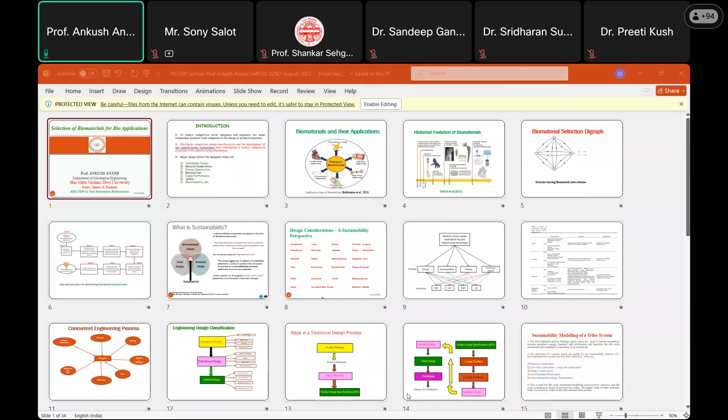Very nice, very nice. So biomaterials are basically those which are to be implanted into the human articular system. So when we say human articular system, it means the human body. So the most important requirement for a biomaterial to be developed is biocompatibility or biotoxicity. So either you call it biocompatible or you call it bio non-toxic.

So it means it should have minimum or zero toxic harm rate, because when we are introducing this material into the body, means into the fluid inside the body, then it should not have any impact or rather any toxic reaction with the body. Why? Because if, God forbid, any chemical change takes place inside the body by introducing this biomaterial in the form of some implant, then it is very likely that some reaction takes place inside the body and the patient is likely to suffer.

So biotoxicity or biocompatibility is the most important aspect of biomaterial selection. Because the thing is, there are a wide variety of biomaterials that are available before the designers. But which material to select, how to select? So there has to be some.

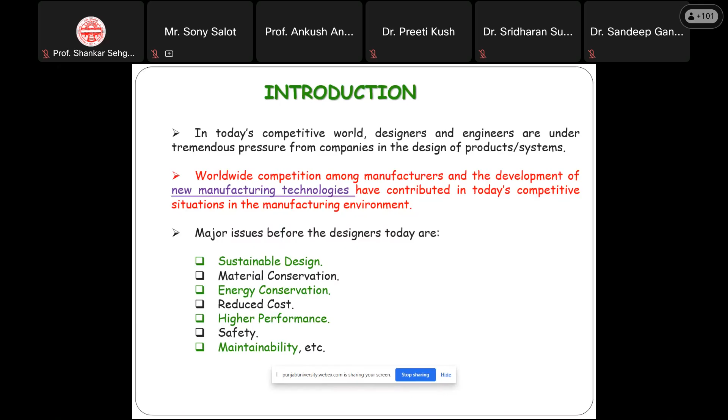So biomaterials and their applications. Generally for biomaterials, we have a large number of materials available. They are generally your polymeric biomaterials, used in applications like skin tissue engineering, bone tissue engineering, cartilage tissue, corneal tissue engineering, cardiovascular or cardiothoracic applications, and some drug delivery systems. This is a general classification of biomaterials. Now,

Hello, Dr. Ankush, sir, your voice is not audible. Participants, am I not audible? Your voice is audible now, sir. Okay, okay. Or you can do one thing - you can stop sharing this PPT for a while, the moment it is required I'll let you know. Probably this may be the reason. Okay sir, okay sir, maybe that's the case.

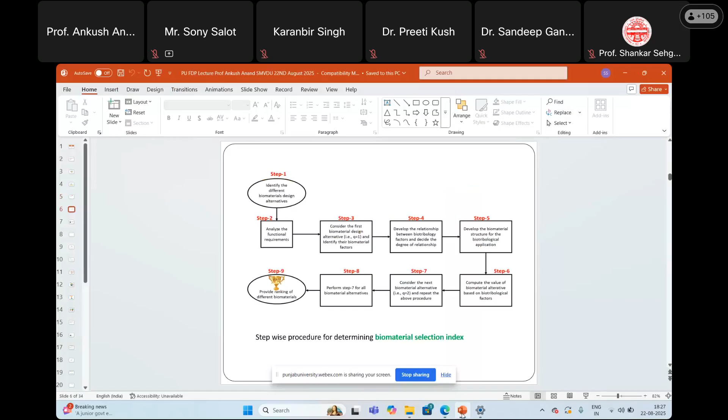So, selection of best suitable material for hip joint. Let us say for hip joint if you want to select, so what are the factors? The basic factors are your mechanical properties that involve your strength, stiffness, and hardness, and other things.

But most importantly is your density. Then biocompatibility, tribology, and economical aspects. So these are the 4 major criteria on the basis of which the material selection for any biomaterial takes place.

Participants, do you think there can be any other factor which is responsible? Because I have tried to include 4 factors for material selection. Number 1, strength. When we say strength, it is essentially your mechanical characteristics or mechanical properties. Then you have your biocompatibility. I have already explained, in biocompatibility, in bio...

We do a test. There is something known as standard medical test. So if the material or the implant passes a standard medical test, then only it is approved, and then only it can be recommended for introducing into the human articular system.

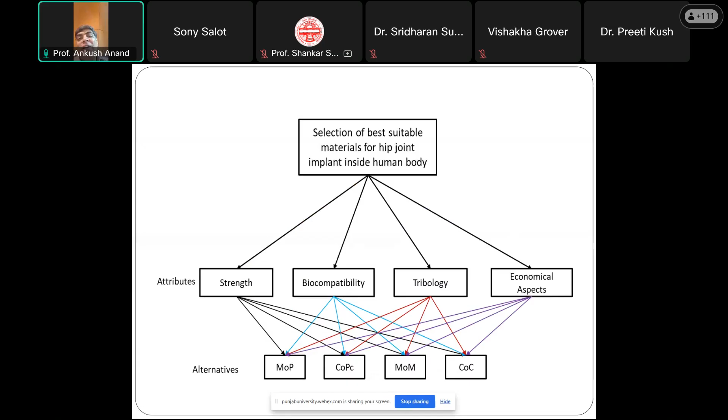That is why a team of designers. A mechanical engineer is one who will be having a strong hold in the area of strength, toughness, hardness, stiffness, density, corrosion resistance, wear resistance, something like that. But when it comes to biocompatibility or toxicity, then definitely those who are involved in clinical procedures or clinical practices will have a greater role to play. So that is why it really becomes challenging while selecting a material.

But definitely every candidate material will have some set of properties, meaning what are the permissible limits, then various test reports, the cytotoxicity and all that. So a number of things are there. That is why material selection is very challenging otherwise. But when it comes to biomedical applications, it becomes very sensitive, because human lives are involved, right?

So should I proceed further? Yes, sir. Thank you, sir. Okay. Can you go to next slide, please?

Next means previous here. Okay, so these are some combinations of materials like metals, ceramics, polymers, then biologically derived materials. They have different pros and cons, right? I'll just talk about examples like stainless steel, cobalt-chromium-molybdenum alloy. Then you have titanium, then titanium-aluminium-vanadium. Then you have nitinol, then nickel, platinum, tantalum, and so on. They are generally used in orthopedic, orthodontic or cardiovascular areas, the heart.

Similarly, when it comes to ceramics, a good variety of materials are available these days. You have zirconia, hydroxyapatite, alumina, beta tricalcium phosphate, then pyrolytic carbon, and so on. And when it comes to polymers, see the wide range of materials. You have PMMA, that is polymethyl methacrylate. Then UHMWPE, ultra high molecular weight polyethylene.

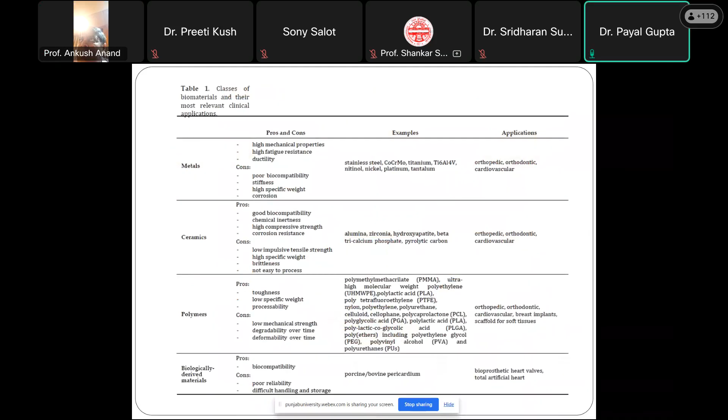whatever you see, material is something everyone is dealing with, whether it is a cooking utensil, your medicines, food stuff, or your hand; anything that you use is made up of material. Do you agree? I agree with this point, but my only concern is, can we say this artificial kidney or any kind of tissue is a biomaterial? I believe they come under the tissue engineering part.

See, whatever field or domain we do, ma'am, are you a clinical doctor, or which field are you from? I'm a researcher. Okay, you are a researcher. The thing is, whether you call it tissue engineering or bioengineering or whatever, basically it involves material scientists, right? Yes, you are right in this. If we have to provide a scaffold for the regeneration of tissues, or if we want to design a complete organ, then definitely we have to provide some material that supports its growth along with maintaining the shape.

Because sometimes it becomes really difficult to say whose role is greater or who has a greater contribution. Let us say the forceps or surgical tools that our surgeons use while carrying out surgical procedures. Essentially they are designed and developed by engineers, and mechanical engineers have a greater role to play. But they remain tools. For things we implant inside the body, there we have the categorization, hard material and soft material. Yes, that is definitely there.

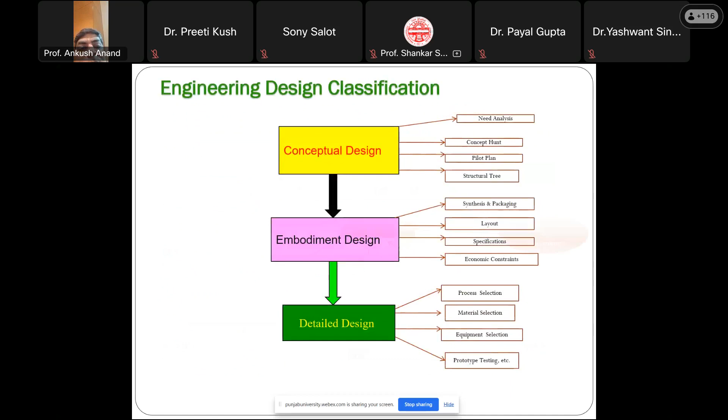Can you go to the previous slides? In one of the previous slides, one flow chart is there. Back. Maybe the third or fourth slide. Go back. It is from the start. You are on the right track. Go back. Okay. Sustainability, I think I'll explain it. Go back.

One flow chart is there. Yes.

So, stepwise procedure for determining biomaterial selection index. So basically what we are doing, we are determining or evaluating the biomaterial selection index for every candidate material. It may be polymer, it may be metal, it may be ceramic, it may be bio-inspired material, or maybe any material, right? So the concept is the material having the high biomaterial selection index will be the first priority.

So now, how to determine the biomaterial selection index? There is a procedure. So what is the procedure? It starts like this. Identify the different biomaterial design alternatives. Like you have metals, you have ceramics, you have polymers, you have bio-inspired materials, and so on, right? Analyze the functional requirements. It means for what particular application you are going to install that biomaterial, or you're going to use this as an implant in the human articular system. So this is your functional requirement.

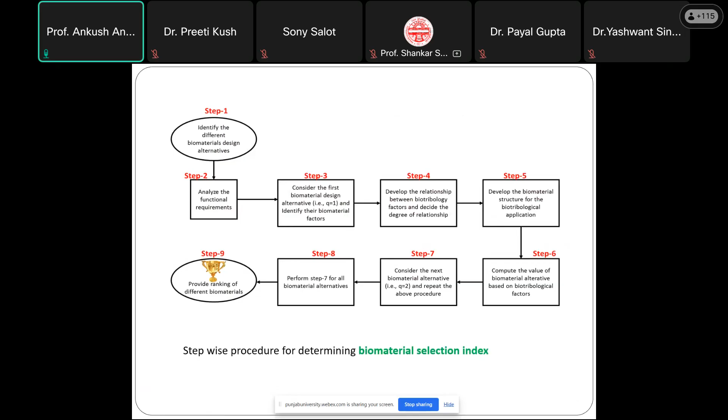So yes, sustainability is there. I wanted to explain, but it is already there. Why? Because it is something related to environment, society and people - environment, society, and your economy or profit. So the sustainability concept is already taken care of while designing for any biological system or engineering system these days, because of concern for environment or life cycle aspects.

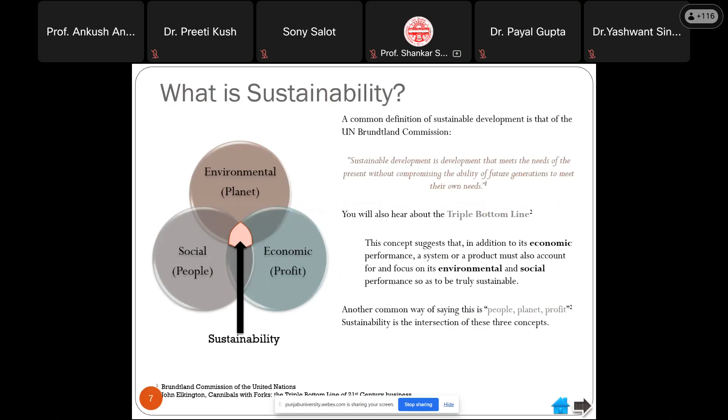So, design consideration and sustainability perspective. How many factors does a designer have to consider while designing for any particular application, maybe a biotribological application?

Functionality, maintenance, reliability, wear, safety, toxicity, lubrication effect, environment, weight, technology used, noise, friction, aesthetics, remanufacturability if possible, strength or stress, volume, corrosion resistance, longevity, marketability, and so on. So these are some of the factors.

So that is why it is not one man's job, it is not one designer's job. It is related to teamwork. When we say teamwork, it means you need to involve the culture of concurrent engineering. You need people from clinical practices, people involved in surgical procedures, material scientists, people with manufacturing or production experience, and people from marketing and so on.

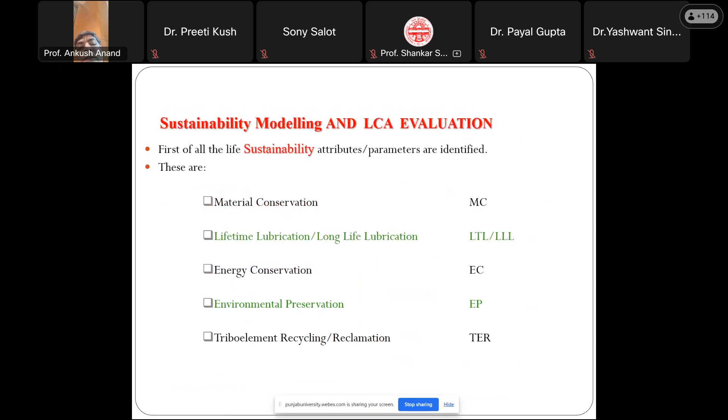So this is how you develop the interrelationship, and on the basis of that, this is how we carry out the sustainability modeling of a tribo element - how one factor relates to another. What are the various small factors essential in that, and on the basis of that you come up with a parameter.

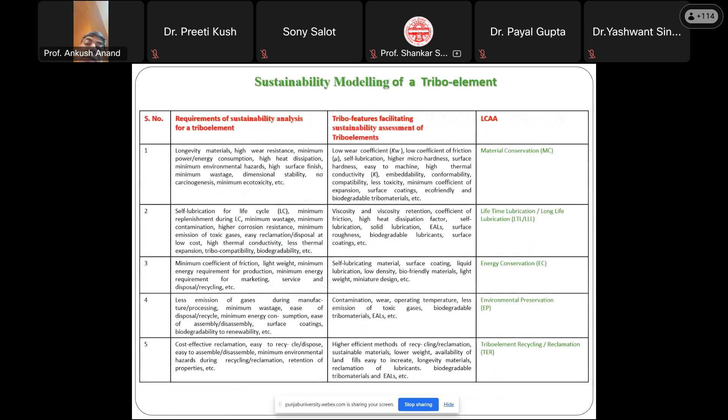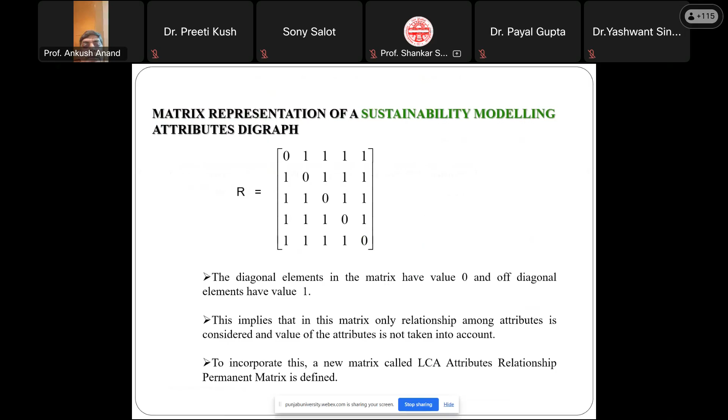So this is how the degree of interrelationship is represented. If it is strong, we give a score value of 0.3. If medium, 0.2. If weak, 0.1, and similarly if none, 0. It is not necessary that you give values in fractions or decimals - you may give values in any number, but in order to reduce subjectivity, a lower scale is considered.

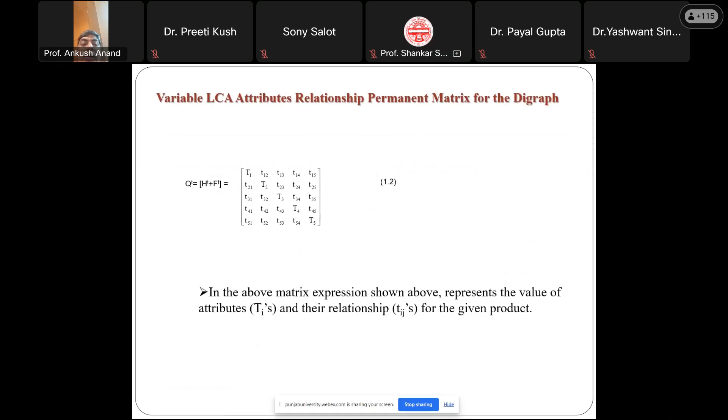So this is the permanent function in matrix form. When you expand this matrix, it will be something like that. This is known as the permanent of a matrix, where all signs are positive - that is, no same polarity, meaning there is no plus minus, all are plus. This is because all plus means no information should be lost; we are carrying out a comprehensive analysis of every candidate material based on the identified parameters.

Similarly, the LCA alternative is better if its LCA-I index is higher and vice versa. The one having the highest index value is the first choice, and based on that you can carry out the evaluation. This example is for some other material, not biomaterials, but the concept remains the same. Being a mechanical engineer, it becomes very difficult to rank and evaluate biomaterials unless we have complete information or data of the materials, as pointed out by some participants. I really appreciate that.

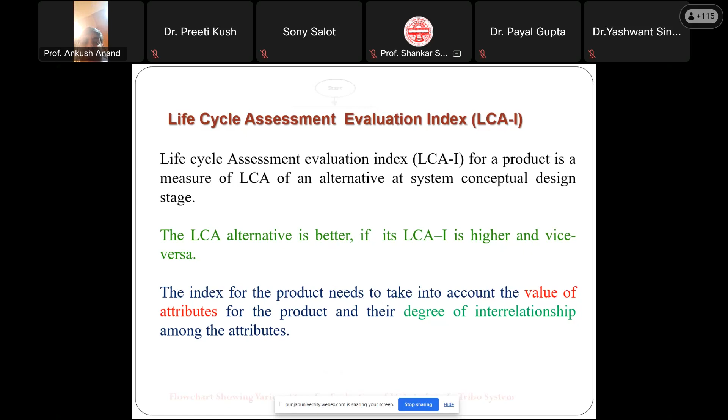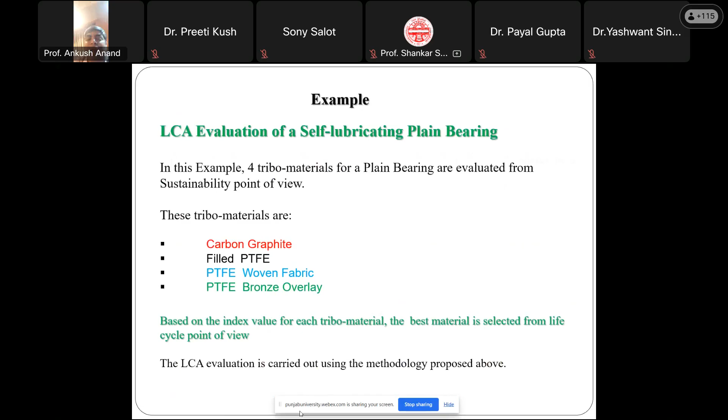Yes, this is a procedure, already explained in different form. So I have taken the example of a plain self-lubricating plain bearing. I had 4 candidate materials: carbon graphite, filled PTFE, PTFE woven fabric, and PTFE bronze overlay. Please remember, these materials are not to be used as bioimplants, these are for some other application. Not bioimplant, but just to explain the procedure, I have taken this example. Otherwise, I have explained the procedure, so now move to the subsequent slides, because this is how the process works.

So think green becomes sustainable. When we say green, while selecting materials for bio application, you must ensure the concept of green. It means ecotoxicity, biocompatibility, or toxic harm rate. So these were some of the things I wanted to discuss, because since I'm using it through my phone and I am far away from my place, I am already there for my other event, right? So that is the thing.

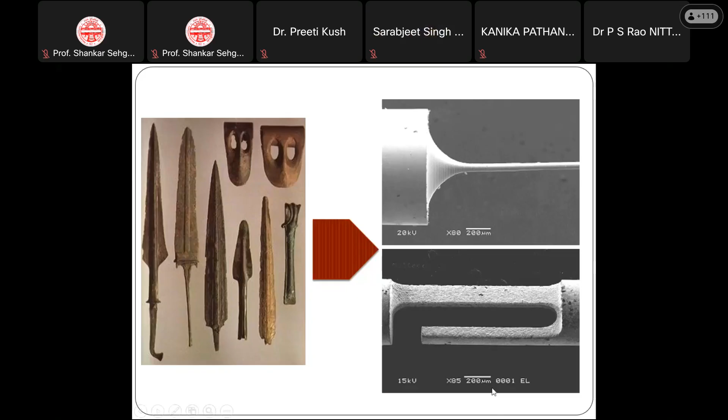The main focus of my topic is the hybrid machining process of alloys and super alloys like titanium, Hastelloy, Monel material, and how we can manufacture these. My introduction covers advanced machining processes, then hybrid machining processes, and electrochemical honing, which is one kind of hybrid machining process combining electrochemical machining plus honing. Then I will also cover future scope. Let us start with this lecture.

My main objective in taking this short-term lecture is to share my knowledge and findings on hybrid machining processes of super alloys and highly resistant alloys, to encourage the research community to focus on hybrid machining process and carry out research in this field to mature the process and make it commercialized. So far we have done many research projects, and now the main focus is hybrid machining process, so that we can develop one process and then go for machining.

Machining, in general conventional terms, is a subtractive type manufacturing process in which surplus material is removed in the form of chips to impart the desired shape. To get the desired shape, we have to remove the excess material, finishing to the final object using suitable cutting tools and relative motion.

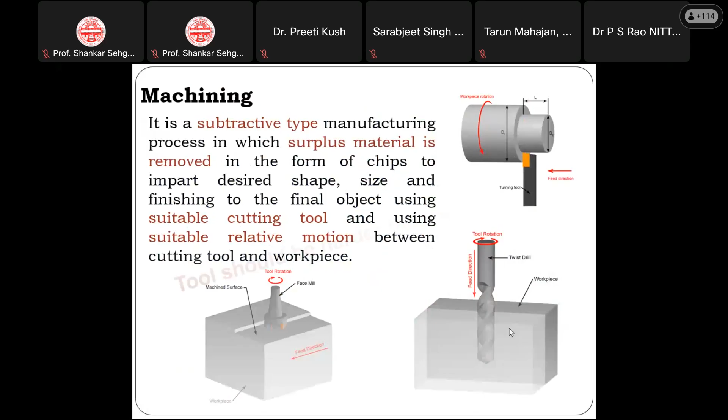So the main introduction is that the development of advanced technological industries has been accompanied by the development of very hard, high strength and difficult to machine materials. These difficult to machine materials are called super alloys, Hastelloy, titanium, tantalum, and non-ferrous alloys, stainless steel, composites, ceramics. These materials are very difficult to machine by conventional machining. For this purpose, we have to go for advanced machining processes or hybrid machining processes.

These materials have high strength to weight ratio and low machinability. That's why the material removal rate is also very less in this case. But we get super finishing, with surface roughness up to the micron and nano level. Producing complicated geometries and maintaining high dimensional accuracy in such materials becomes extremely difficult with conventional machining. That's why we are going for non-traditional as well as hybrid machining processes to machine very complicated geometries with high dimensional accuracy.

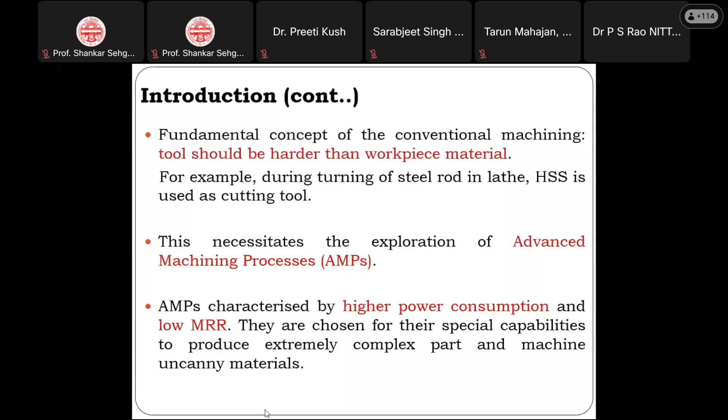The fundamental concept of conventional machining is that the tool should be harder than the workpiece material. For example, in the lathe, HSS, high-speed steel, is used as a cutting tool, and this necessitates the exploration of advanced machining processes. Advanced machining processes, AMPs, are characterized by high power consumption and low MRR. You can choose electrochemical machining, electro discharge machining, ultrasonic machining, water jet machining, laser jet machining. They are chosen for their special capabilities to produce extremely complex parts and machine difficult materials.

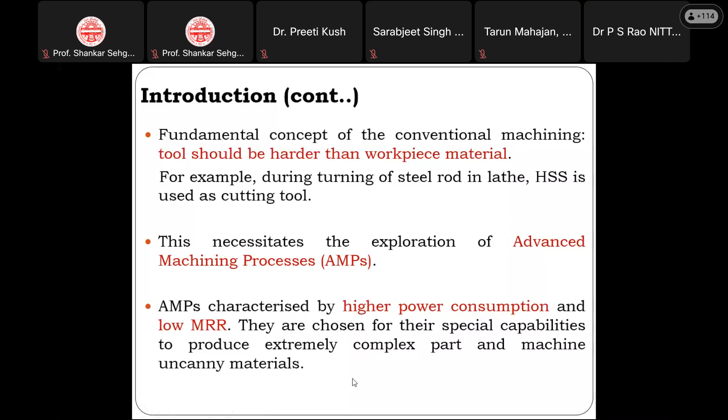Okay. So here I will highlight the advanced machining processes. We have four kinds of energies: mechanical, chemical, electrochemical, and thermoelectric energy. With mechanical energy, the process is driven by high velocity particles, and the processes are abrasive jet machining and ultrasonic machining. Chemical is the corrosive action of an agent, that is chemical machining and photochemical machining.

Then electrochemical, that is ion displacement. The ions take part in the machining, and cations and anions form at the respective cathode and anode, so that we have the chemical reaction. That chemical reaction removes the excess material from the workpiece, so you can get surface roughness up to the nano or micron level. The processes are electrochemical machining and electrochemical discharge machining.

The last is thermoelectric. Thermoelectric energy is used for material removal by fusion and evaporation. The processes include electro discharge machining and electron beam machining. Normally we use all these processes for better finishing and more material removal.

Now you can see the list of AMPs. Here I highlighted the various AMPs by energy type: mechanical, electrochemical, chemical, and thermoelectric. We discuss one by one what the process is, how material is removed, the energy source, and the surface roughness quality. For mechanical, the mechanics of material removal is erosion, the transfer media is high velocity particles, and the energy source is mechanical or fluid motion. The processes include abrasive jet machining and ultrasonic machining.

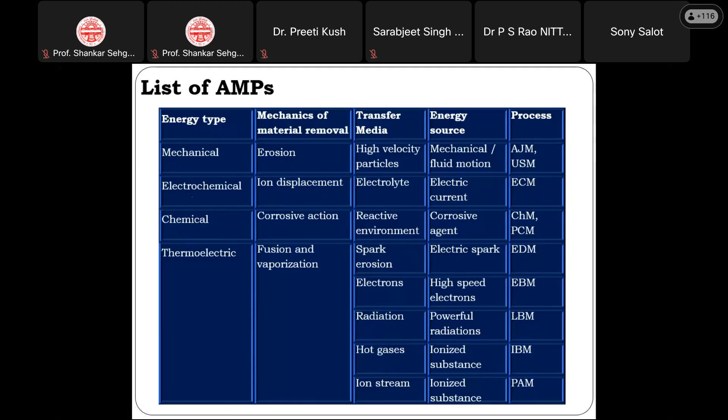Your voice is not coming. Yeah, 1 minute, sir, I will take 1 minute. Okay. Yes, sir, am I audible? Yeah, okay.

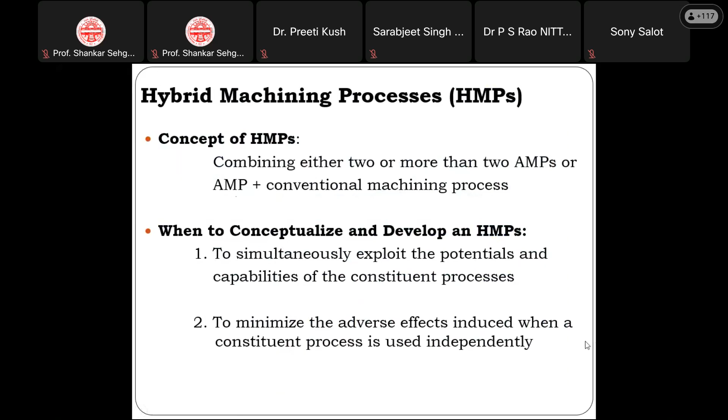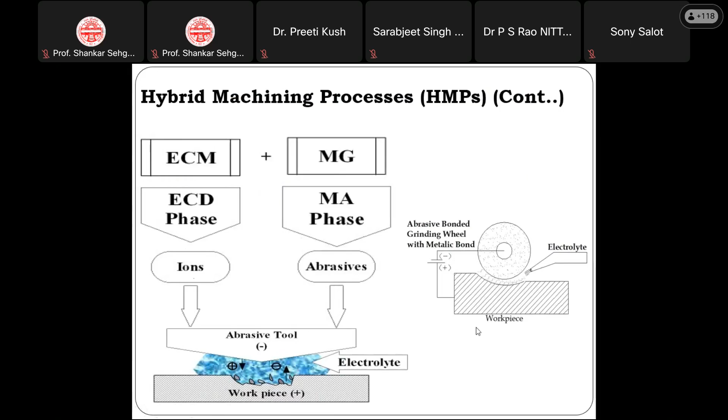Now the classification. You can see constituent processes are directly involved in material removal, that is the electrochemical grinding process. Then one process directly removes the material, while the other process only assists by making the machining environment favorable. This is ultrasonic assisted abrasive flow machining. Here during the abrasive flow machining, we are removing the excess material. The ultrasonic is giving assistance to the abrasive flow. So through this ultrasonic assistance, we are getting some amount of material removal, but more material is removed by abrasive flow machining.

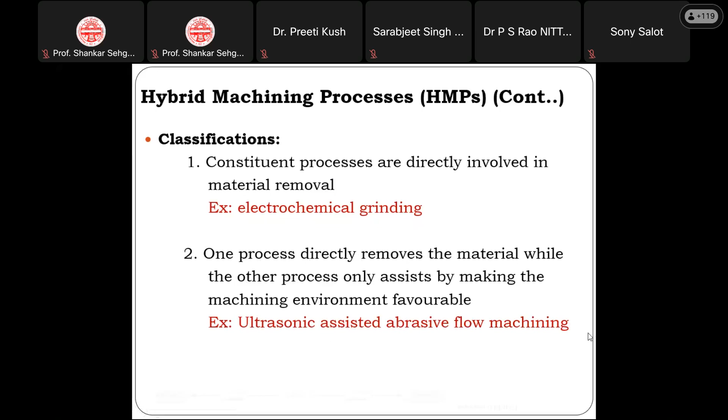Now we can see electrochemical discharge machining, ECDM. What happens exactly here is electrochemical dissolution plus electrodischarge erosion. Here normally we are passing the electrolyte through this. Electrochemical discharge machining is the combination of electrochemical machining and electrodischarge machining. So here you can see the electrochemical dissolution plus electrodischarge erosion.

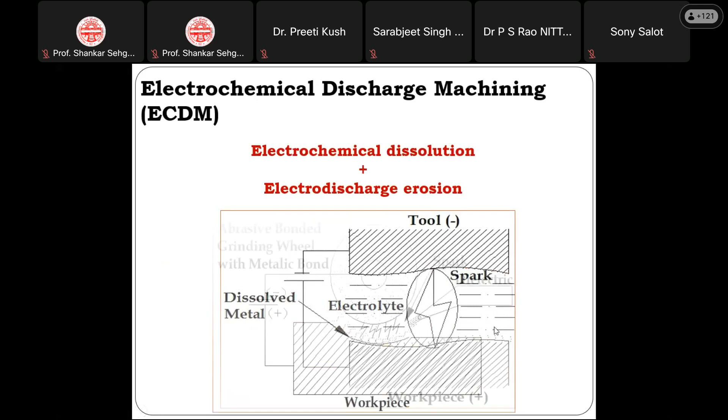Next, electrochemical discharge grinding. Here you can see electrochemical dissolution plus mechanical abrasion plus electrodischarge erosion. So here the tool is connected to the negative, and the electrolyte is passing. Electrolytic dissolution plus mechanical abrasion is there, then electrodischarge erosion. The three processes are taking place in this.

And the left part is the abrasive bonded grinding wheel with a metallic bond. The abrasive may be any kind: cubic boron nitride, aluminum oxide, silicon carbide, diamond, any abrasive we are using. Since those abrasives are tough in nature, we can remove the excess material in this process.

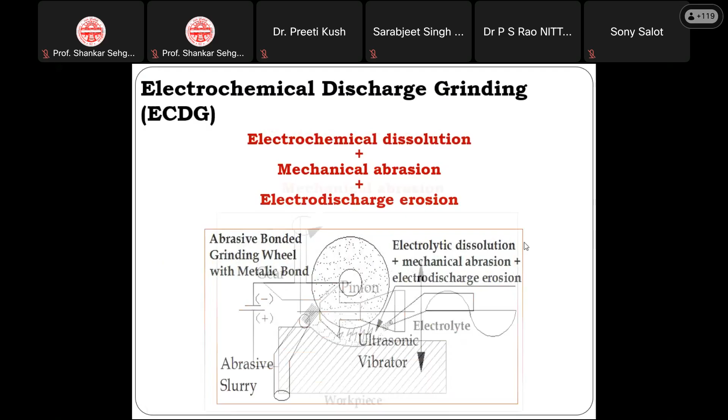Next, ultrasonic assisted lapping. Here the main thing is lapping with ultrasonic assistance, ultrasonic vibration. So here we have this gear and pinion arrangement, an ultrasonic vibrator, and we are using abrasive slurry. The main thing is ultrasonic vibration plus mechanical abrasion. Together it is called the ultrasonic assisted lapping process.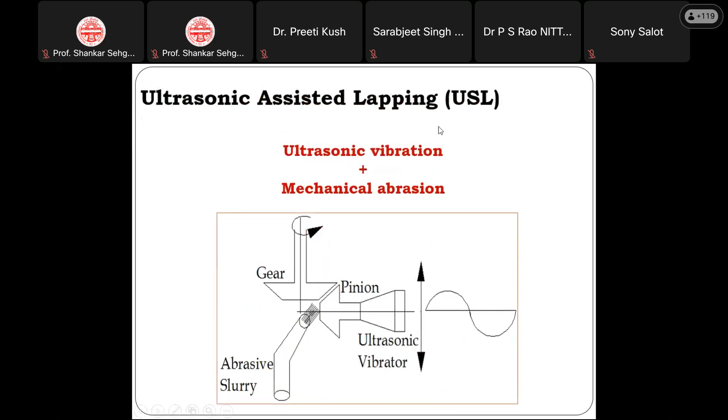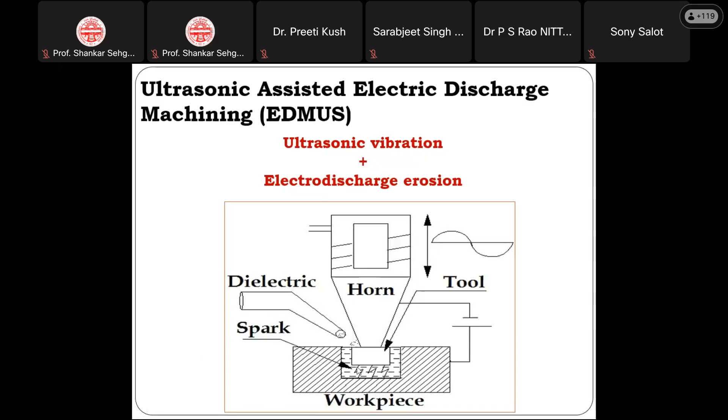Through this horn, through this ultrasonic process, we are giving vibrations to the workpiece, and the spark is generated through this dielectric. Using this spark and ultrasonic vibrations, we can remove the excess material from the workpiece, and we can develop the hybrid machining process particularly for all the super alloys.

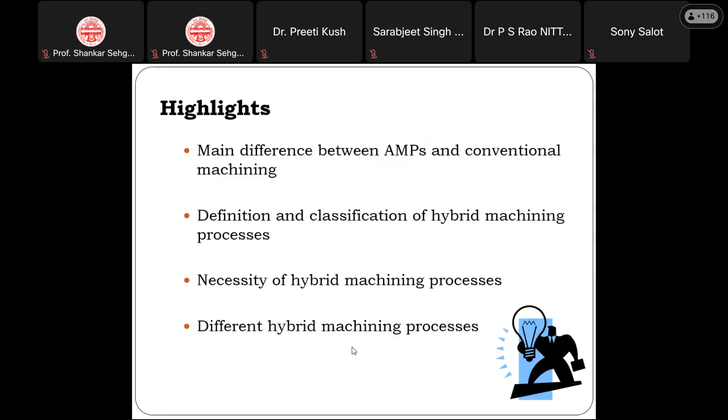Now we switch over to one main thing: electrochemical honing. This is one main hybrid machining process I am explaining, which I want to explain for the super alloys.

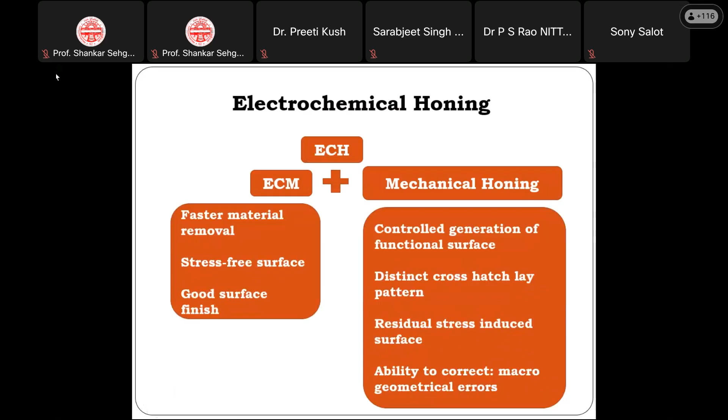You can see the benefits: faster material removal. Then next is stress-free surface. Then the third one is good surface finish we are getting. And in mechanical honing, we have the controlled generation of surface and distinct cross-hatch lay pattern, residual stress induced surface, and ability to correct macro geometrical errors.

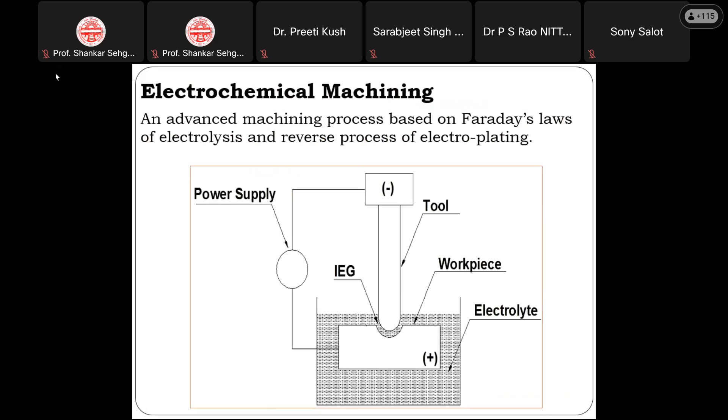Then electrolyte is flowing, and we are maintaining some inter-electrode gap, that is the gap between the tool and the workpiece, so that we can maintain the IEG up to the micron level, so that we can remove the material by the tool as well as the electrolyte. Then it is called electrochemical machining. Then what chemical reactions take place?

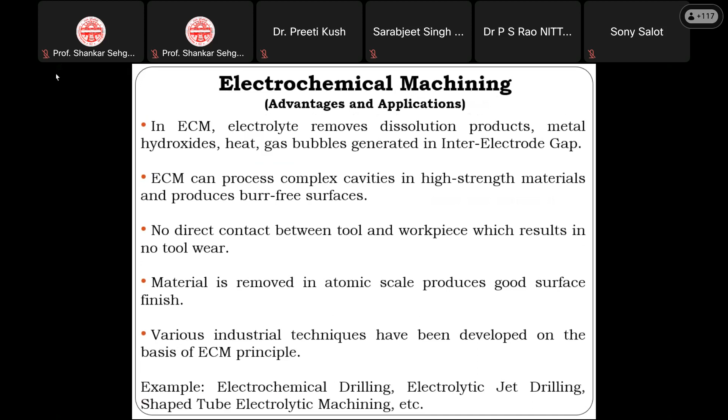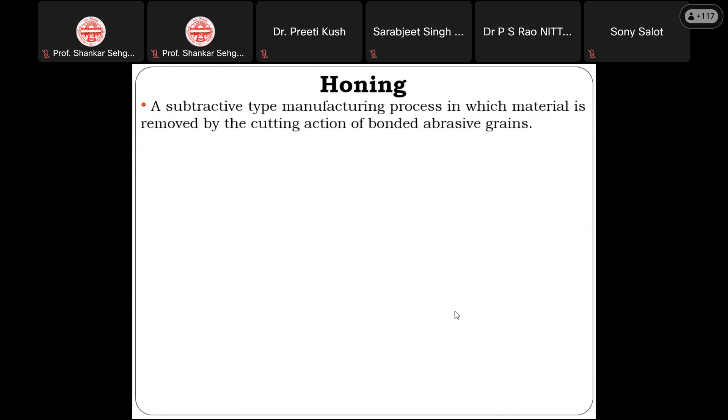Use honing to improve the form, dimensional precision, and surface quality of your workpiece under constant surface contact with the tool. Honing is applied for precision machining, such as grinding and lapping. Different honing techniques are commonly used in industries, classified into three main groups.

One is longitudinal stroke honing. Second is short stroke honing. Third is frequently designated as super finishing honing.

These are employed to produce high finish and correct out of roundness, taper, boring tool marks, bell mouth, barrel, and axial defects that occur in the hole making process. Bell mouth can be corrected, barrel shape can be corrected, axial distortion can be corrected, taper can be corrected, and we can achieve cylindrical roundness too.

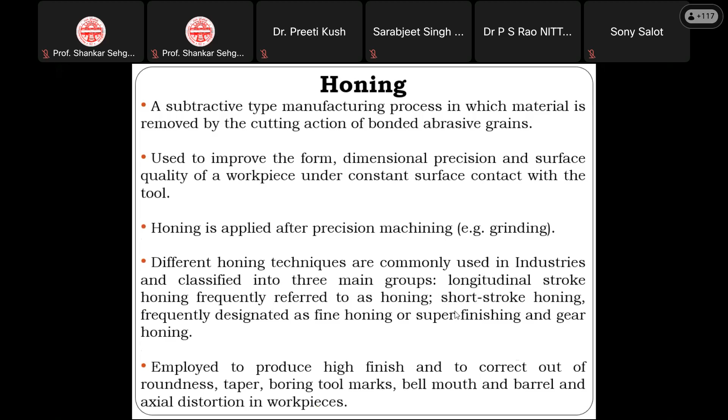Longitudinal stroke honing is used for connecting rod holes, brake drum cylinder liners, and internal cylinder surfaces. This honing tool, after going through rotation as well as reciprocation motion, gives us a good surface finish in the internal cylinders.

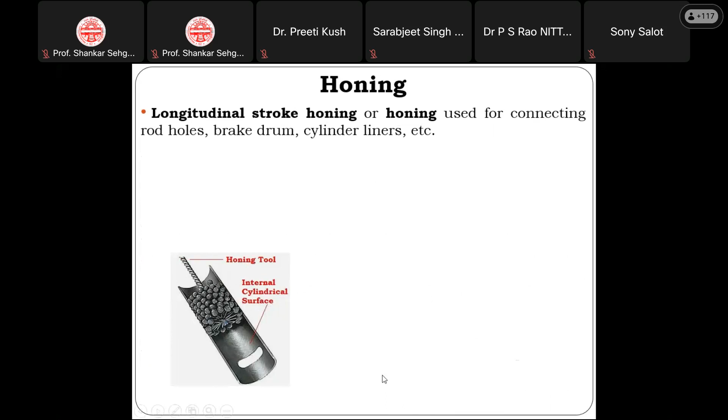The second type is short stroke honing, used for the crankshaft and the rotor shaft. These are the honing tools we use, and this is the workpiece with translatory motion. By using this honing tool, we achieve the surface finish of the workpiece.

The third one is gear honing, used after grinding in order to create low noise surface patterns on the tooth flanks. You can see this in the picture.

The workpiece is in the same setup, and the honing tool removes the excess material from the workpiece. This honing tool may be silicon carbide, aluminum oxide, or cubic boron nitride, and through this honing tool the workpiece generates a good surface finish.

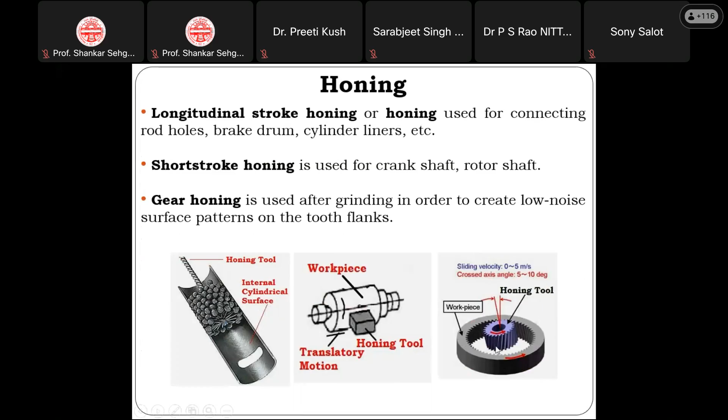Now we move to electrochemical honing (ECH). Its various benefits include combining the faster material removal capability of ECM with the functional surface generating capability of conventional honing.

ECH is employed to produce precision finishing and improved surface integrity. The process is 5 to 10 times faster than conventional honing and 4 times faster than grinding. These are the research aspects, clearly showing the various process comparisons.

It can provide surface finish up to 0.05 micrometers. The ECH principle is generally used for finishing of internal cylinder surfaces, ECH of cylinders, and ECH of gears.

These are the setups we developed at IIT Roorkee: ECH of cylinders, both internal and external, and ECH of gears, including spur gears, bevel gears, herringbone gears, and helical gears. We have produced all of these.

Now let's look at the process principle. In ECH, the workpiece is used as the anode, the tool is used as the cathode, and a DC potential is applied across them, supplying current between the anode and cathode.

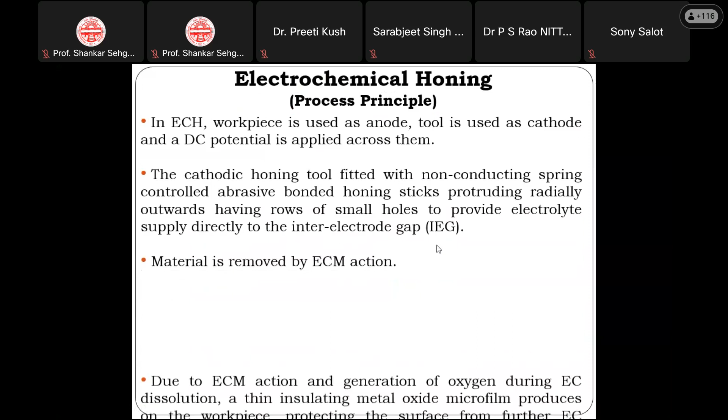The material is removed mainly by ECM action, with about 20% removed by the honing process due to ECM action and generation of oxygen during EC dissolution. A thin insulating metal oxide microfilm forms on the workpiece, protecting the surface from further EC dissolution.

Simultaneously, the rotated and reciprocated abrasive bonded honing sticks scrub away the insulating film and accelerate the process. These are some aspects of the process principle.

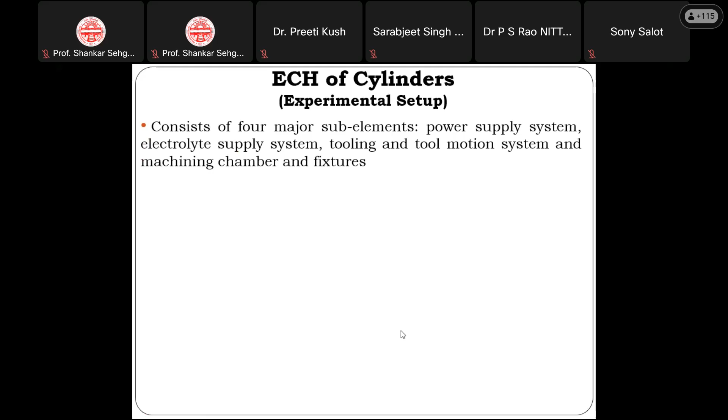Now you can see the experimental setup. It consists of 4 major sub-elements: power supply system, electrolyte supply system, tooling and tool motion system, and machining chamber and fixtures. You can see here the whole picture of this.

Here this is the tool which is connected to the cathode, and the workpiece, which is positive, is connected to the anode. A DC power supply is given to the cathode as well as the anode. The tool is rotating as well as reciprocating, having vertical motion as well as circular motion.

We are passing the electrolyte through this chamber, heat exchanger, through this reservoir. Whatever is used comes back through this filter pump, again going to the reservoir. There is no wastage of electrolyte in this case.

Here you can see these are the tools. The hash line shows these are the honing, abrasive bonded honing stones, which are silicon carbide. By using this honing as well as the electrolyte, we can remove the material. This is the fixture made for this tool. So this is actually the experimental setup.

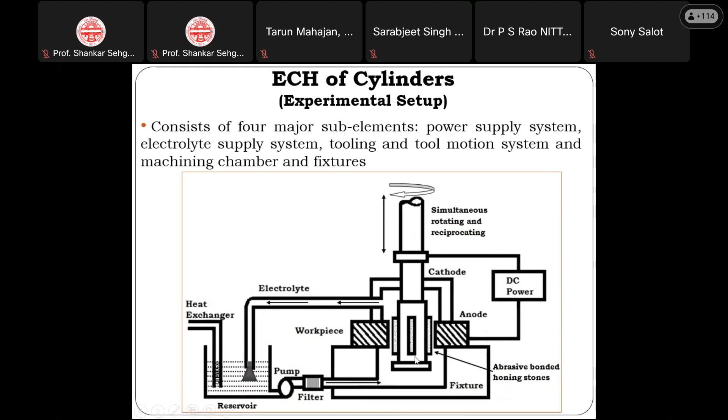Sometimes it is micro level and sometimes nano level, depending on how much you are going for the machining, what kind of tool we are using, and what kind of abrasives you are using.

Then it's a cylinder setup. This is about the gear. Now you can see the cylinder setup. Here we are having this tool, which is connected with the honing stones, these honing sticks. These conductive honing sticks, and the workpiece is connected to the positive.

The rotating and reciprocating honing tool is connected to the negative. This is the electrolyte passage, and these circles show where the electrolyte is entering into the workpiece through the honing as well as the electrolyte process. We can remove the material.

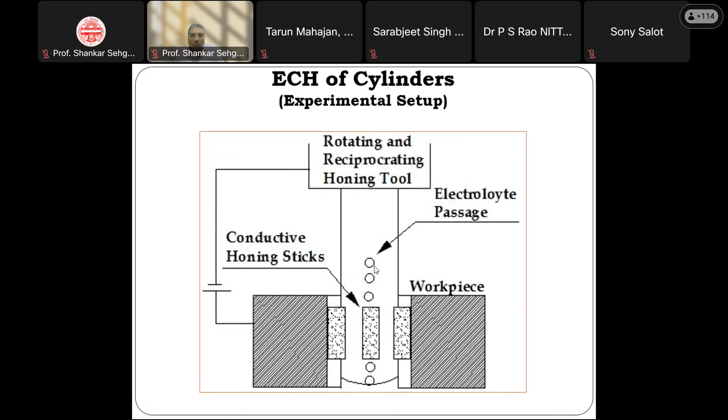Now next is ECH of gears. So this is about the ECH of cylinders I told you.

Now, ECH of gears. Gears are a vital element, as you know, in mechanical industries, to transmit power and motion efficiently and economically. Today, in all the industries, we are using gears as a major element. Whether in mechanical industries, automobile industries, or electrical and electronic industries, gears play a very important role and are used economically in these industries.

Annually, 2 to 3 billion gears are consumed worldwide, with turnover running into several billion euros. 70% of gear manufacturers expect gear sales volume to increase in 2014.

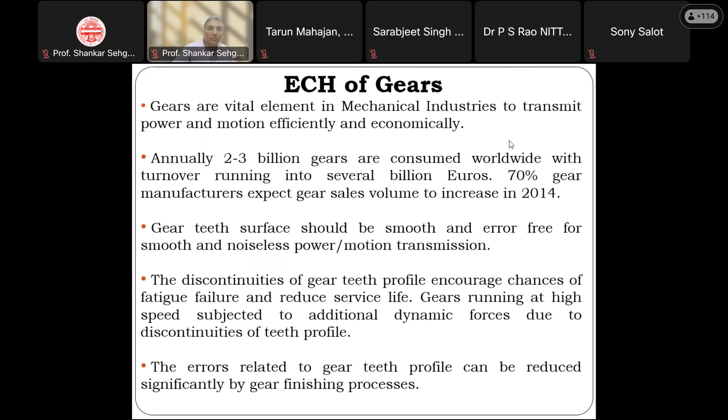Until now, we have covered so much. Gear teeth surface should be smooth and error-free for smooth and noiseless power and motion transmission. Discontinuity of gear teeth profile encourages chances of fatigue failure and reduces service life. Gears running at high speed are subjected to additional dynamic forces due to discontinuities of the teeth profile. The errors related to gear teeth profile can be reduced significantly by various gear machining processes, which we'll be discussing.

The conventional gear machining processes you know are gear grinding, gear shaving, gear honing, and gear lapping. There are so many conventional gear machining methods. Now we are using electrochemical honing of gear process, since these conventional methods are costly and time consuming and have material hardness limitations.

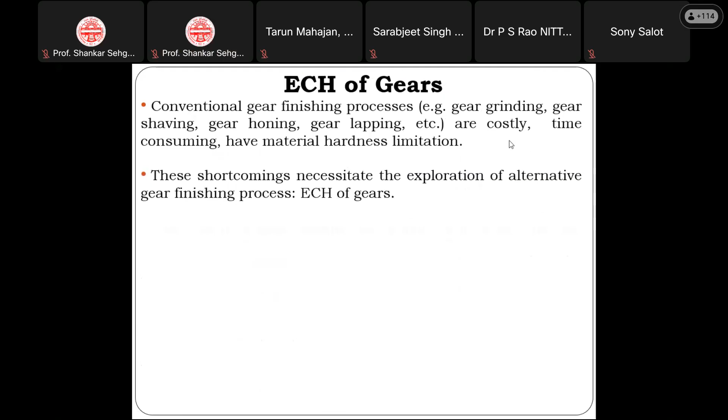These shortcomings necessitate the exploration of alternative gear finishing processes like ECH. Through conventional gear machining, it is hard to remove the material and it is a time consuming process, and we have to go for very bulk lots for the manufacturing. Here we go - these shortcomings necessitate this ECH of gears.

The ECH of gears was initiated by first studies from Capello and Bertoglio in 1979. Later, the fundamental concept of material removal remained the same, but the tooling system differs between ECH of gears and ECH of cylinders. Different kinds of tools have been made for cylinders as well as gears.

Three types of gears are used to maintain the tooling system: the workpiece gear, cathode gear, and honing gear. In the next slide, we show how the workpiece gear can be finished using the cathode gear and honing gear.

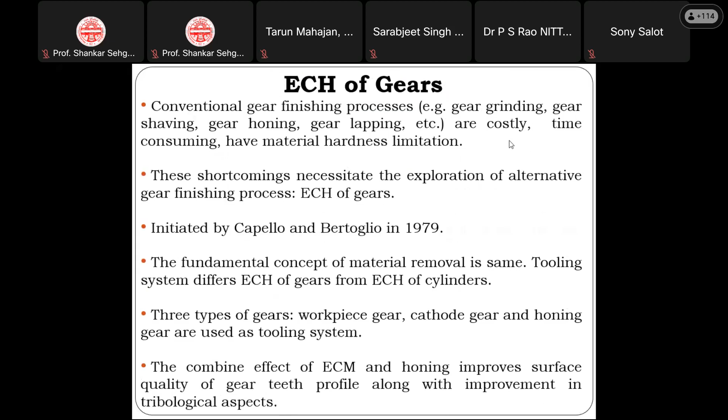The combined effect of ECM and honing improves the surface quality of the gear teeth profile, along with improvement in the tribological aspects. These tribological aspects are very good in nature when we use this ECM and honing process.

Now you can see the ECH of gears process parameters. There are four kinds of related parameters: power supply related, electrolyte supply related, workpiece related, and honing related.

For power supply, the main parameters are electric current, pulse on time, pulse off time, duty cycle, and voltage. These are the main parameters for the power supply.

For electrolyte supply, we have the electrolyte composition - what composition we are using, 10%, 20%, 50%, 100%, like sodium chloride, sodium nitrate, potassium bromide, potassium chloride. Then concentration - how much concentration of sodium chloride? And if we use mixed electrolytes like sodium chloride and sodium nitrate, how much of each - 10% sodium chloride to 90% sodium nitrate, or 20% sodium chloride to 80% sodium nitrate.

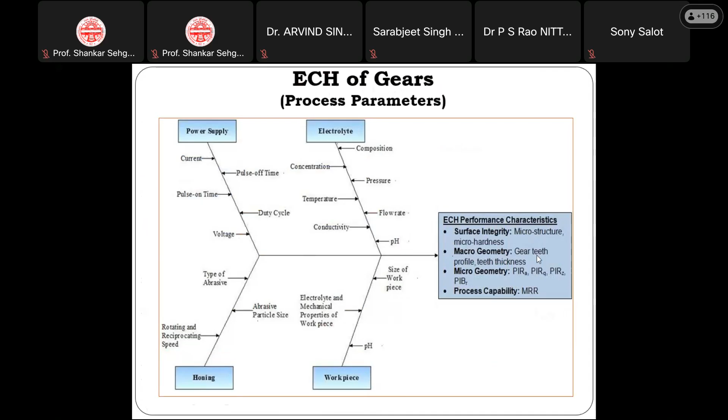What output you want to see is what is the MRR, material removal maximum, and what is your contribution towards the surface roughness of the particular material. So now you can see the ECH of gears experimental setup.

Okay. Now in the experimental setup, this is actually the schematic diagram: power supply, honing tool, and the carbon brush slip ring assembly, and we are having this IEG gap between the tool and the workpiece, and the electrolyte is supplied here to the tooling system. The whole system is called the machining chamber. Here is the tool motion system, which is controlled by the speed controller.

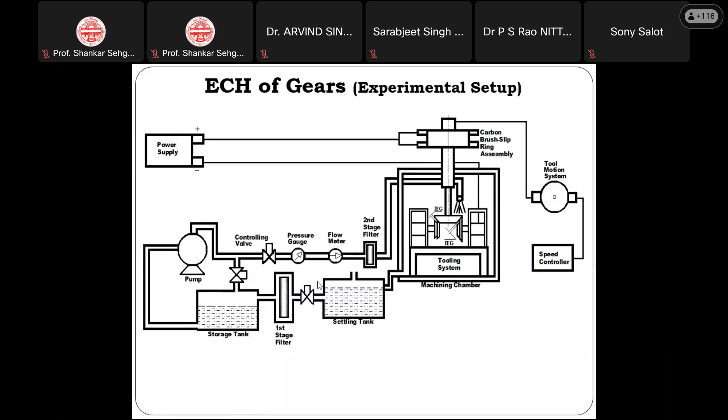Here is the electrolyte settling tank, this is the storage tank, and this is the first stage filter. After that it goes to the storage tank. Again through this pump it is going to the controlling valve. Through the pressure gauge we can measure the electrolyte pressure. Through the flow meter we can see the electrolyte flow. Second stage filter, again it is forwarding onto the tool and workpiece. So the whole process is called electrochemical honing of gears: the power supply system, workpiece related system, honing related system, and electrolyte system.

Now, this is the actual setup we developed in IIT Roorkee. This is the whole machining chamber, where this is the tool, this is the workpiece, and you can see these are the bevel gears. This is the pulse power supply we are giving, electrolyte supply. This is the pressure gauge; we can measure the pressure. We can see the flow meter, flow control valve, and electrolyte supply pump.

And here this is the speed controller, electrochemical machining, then pulse electrochemical. Electrochemical machining is the standard version. If you are using pulses in place of continuous current, it is called pulse electrochemical machining. Then the electrolyte settling tank is there, and the first stage magnetic separator cum mechanical filter, electrolyte storage tank. This whole setup is called the electrochemical honing of gears experimental setup.

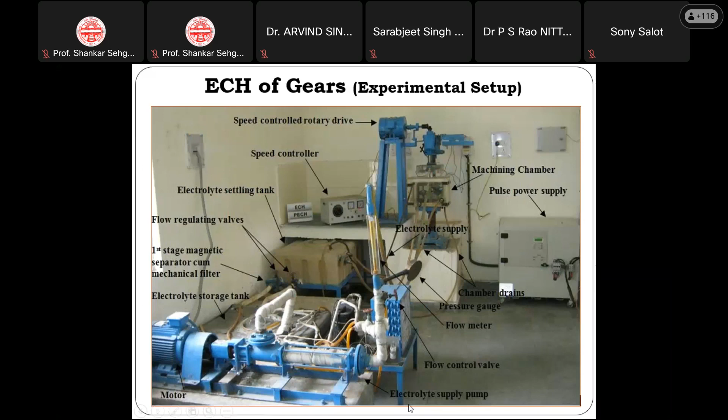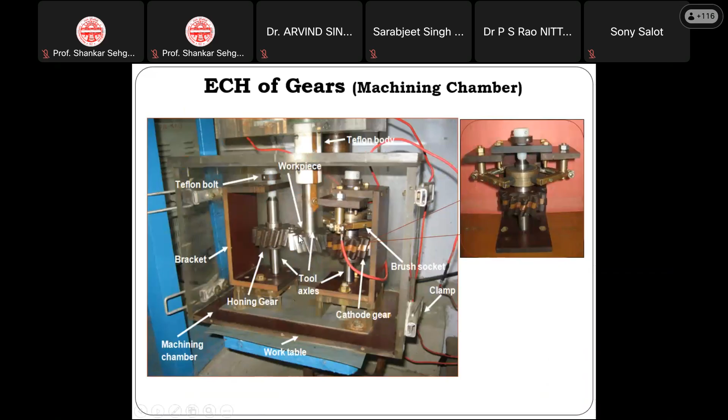And you can see here the electrochemical machining chamber. So this is the workpiece. This is a Teflon body. This is the cathode gear, honing gear, and the whole system. You can see this is the copper tool, and the upper one and lower one are the honing gears, and this is your workpiece gear where we have to remove the material. Okay, these are the arrangements made for the process.

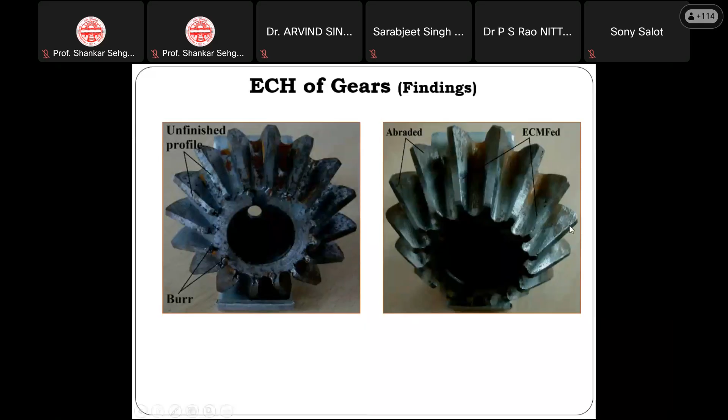So this is about the bevel gears, and these are the spur gears. So these are also spur gears. Okay, so three kinds. You can see the gears in unfinished profile, and after the machining you can see the ECM'd surface. The burrs formed during the machining have been removed by using the electrochemical honing process.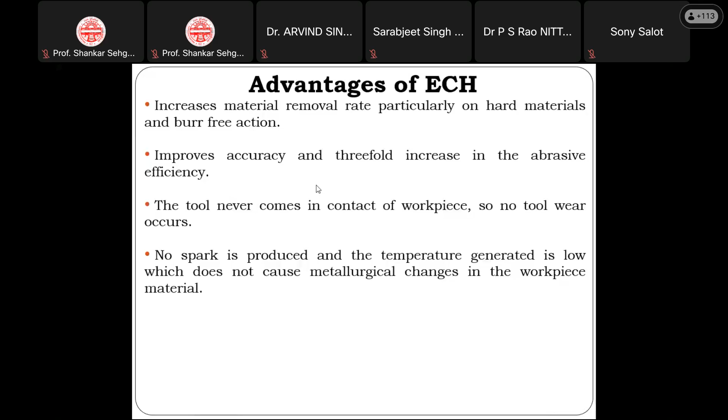And less pressure is required between the work surface and the abrasive stones. And it has a faster and higher material removal rate with reduced hone wear. It is about 10 times that of conventional honing, and about 4 times that of internal grinding. So if you compare grinding as well as honing, it is faster, about 10 times conventional honing and about 4 times faster than the internal grinding process.

Now we can see the workpiece must be conductive in nature. This is the very first primary parameter. The workpiece must be conductive. Second, a huge amount of energy is consumed. Okay. Limitation: ECH is more costly than the conventional type because of its electrical and fluid handling.

ECH tooling and longer setup time compared with conventional honing make the process more economical for longer production runs and the job conditions. So if you use this electrochemical honing, we can compare with conventional honing and improve the process. It is more economical for longer production runs, and in tool room and job shop conditions also we can go for this.

Then blind holes are not as easily handled as through holes. However, with blind holes, sidewall parallelism and diametric accuracy are facilitated if an undercut is machined below the bottom area. You can see the application also. In ECH, most of the material is removed by the ECM.

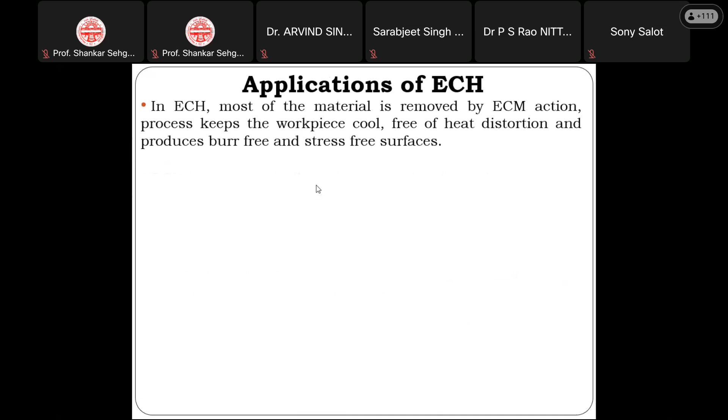As I told you, about 80% of the material is removed by the ECM action. The process keeps the workpiece cool, free of heat distortion, and produces burr-free and stress-free surfaces. As this is a hybrid or non-traditional machining process, the main target of the process will be stress-free and burr-free surfaces.

Then rotating and reciprocating honing motion corrects shape deviations of cylindrical workpieces, such as circularity and cylindricity. We can go for better correction of cylindricity. Taper also, when we have taper shape products, barrel shape, all can be machined, axial distortion and boring tool marks. Whatever geometric irregularities are there can be improved by using the ECH process.

The main aim of ECH for cylinders is that you can correct the circularity and you can correct the cylindricity, and taperness, bell mouth hole, barrel shape, everything can be corrected.

Then ECH has no material hardness limiting factor, only that the material must be electrically conductive. Since the material is electrically conductive in nature, there is no limitation in hardness for electrochemical honing. Whatever the hardness before the machining process, after machining it is the same. There is no change in the hardness.

Examples are cast steels, high alloyed steels, carbide tools, titanium alloys, super alloys, Incoloy, Inconel, stainless steels, Waspaloy, and Monel, a typical list of materials processed by ECH. These are all super alloys, and they can be machined using the ECH process. It increases the life cycle of the critical

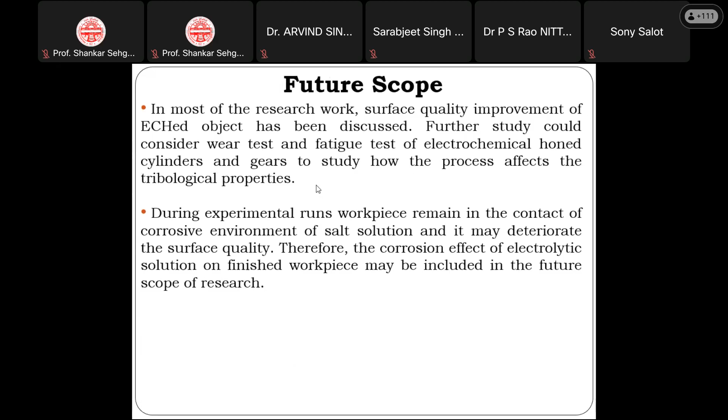During experimental runs, the workpiece remains in contact with the corrosive environment of salt, that is sodium chloride solution, and it may deteriorate the surface quality. Therefore, the corrosion effect of the electrolyte solution on the finished workpiece may be included in the future scope of research. Nobody has worked on this. Since we are using electrolytes like sodium chloride and sodium nitrate, corrosion takes place, so that can be studied further.

And as we studied ultrasonic assisted and magnetic assisted processes, we can go for these in future scope. Magnetic field has been integrated with several processes such as electrochemical grinding, abrasive flow machining, and ultrasonic machining to obtain better outcomes. The performance of magnetically assisted ECH may be explored. So far we have just gone for the traditional electrochemical honing process. We can make magnetic assisted ECH and ultrasonic assisted ECH, and improve the efficiency by using an ultrasonic assisted or magnetic assisted tool.

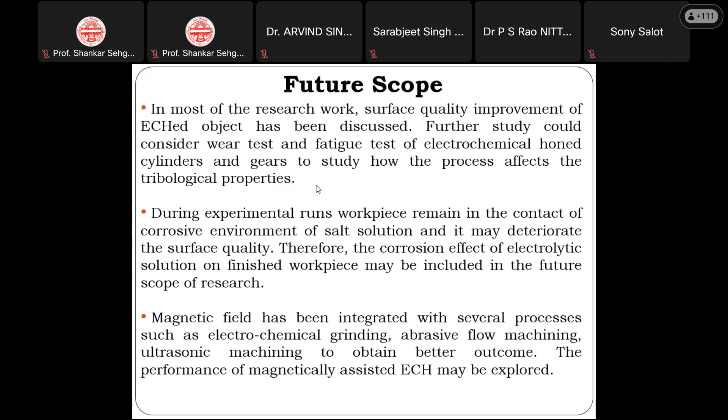To achieve real-time interaction with the user and provide online process control, elaborate simulation of the ECH process may be undertaken, such as finite element simulation. In addition, three-dimensional analysis of the ECH process using the finite element method and finite difference method may help in better understanding of the process. So we can go for 3D modeling simulation of the ECH tool to find out the stress distribution, strain, and deflection, and study the exact mechanical properties of the ECH component.

So the main message of electrochemical honing is that it is an electrochemical-based hybrid machining process to machine various super alloys like titanium, Inconel, Incoloy, Waspaloy, and Monel material. It is capable of providing micro and nano level finishing to cylindrical surfaces and various gears.

It requires a comprehensive study for commercialization in industries. So we can go for small fabrication of these processes, so that we can go for patenting and commercialization of this process in industries.

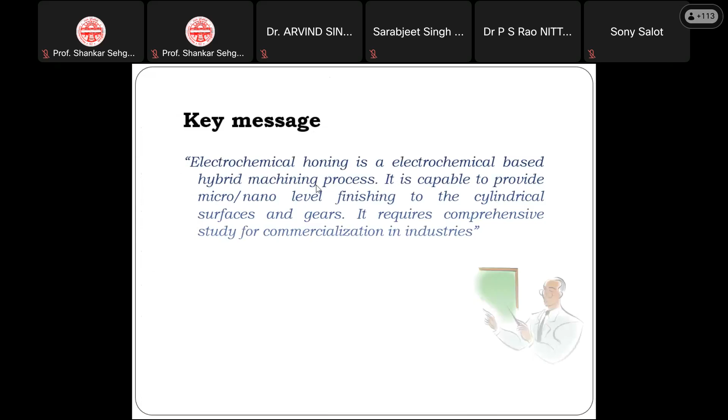My aim was to deliver the talk on hybrid machining processes of super alloys. So thank you so much.

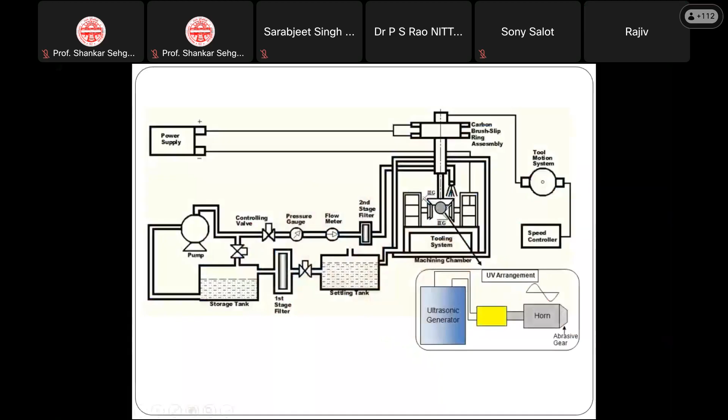So my question is, sir, could you please tell me, if I want to machine a micro channel in brass material, which technique is good for that? Which component do you want to machine? A micro channel. Am I audible or not? Yeah, you are audible, sir.

So for the micro channel, you can go for the traditional laser machining process. That is only traditional, it is not hybrid machining. You can go for laser machining and the plasma arc machining process. In the electrochemical process it is not that much possible. I think laser machining and plasma arc machining are better for those channels.

Sir, I have read that researchers have used EDM, that is electric discharge machining. Why so? EDM also you can do. If you want to go for any new innovative thing, you can go for those processes. EDM and ECM also you can do, it is not a big issue. But if you want a different process, even with EDM you can add magnetic assisted or ultrasonic assisted processes so that you can improve.